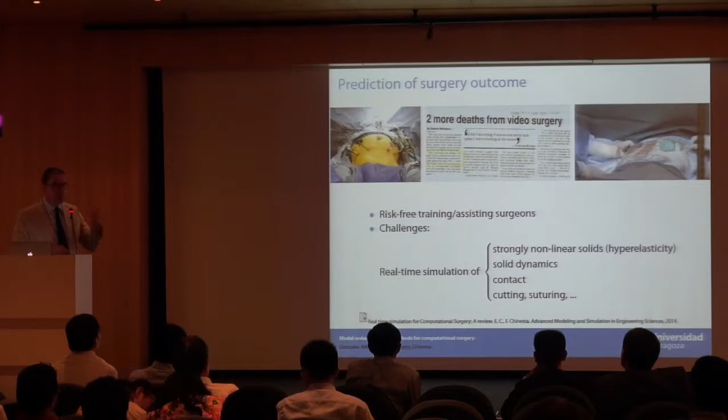Okay, so why not think of computational simulators as a way to train surgeons? But this faces important challenges. The most important challenge is the real-time simulation of the very complex coupled and nonlinear phenomena occurring during surgery. We will be dealing with strongly nonlinear solids. Soft living tissues are usually modeled as hyperelastic. We will need to take into account solid dynamics, contact, cutting, suturing, many challenging phenomena.

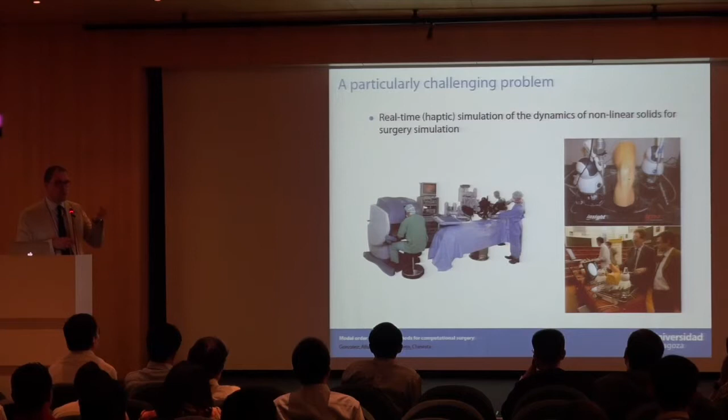Well, other training devices, you can find here two specific examples for knee and shoulder surgery, incorporate this type of apparatus. This is a haptic device, okay? An apparatus that provides you with the sensation of touch, the force response of the system.

But in order to provide a realistic sensation, very much like you need some 25 to 50 frames per second in cinemas to perceive a continuous motion, you need some 500 Hz to 1 kilohertz response in force feedback. Well, of course, you can imagine that this is a challenge. You need to simulate and to show your resulting images at 20 Hertz. Contact detection can be made in a parallel thread in the simulation at about 200 Hertz.

But more importantly, you need to simulate the deformation of strongly nonlinear soft tissues at 1 kilohertz, 1,000 times per second. Any of you that have played with Abaqus know how much time a hyperelastic simulation takes in an average computer. So the challenge of doing this 1,000 times per second is clear.

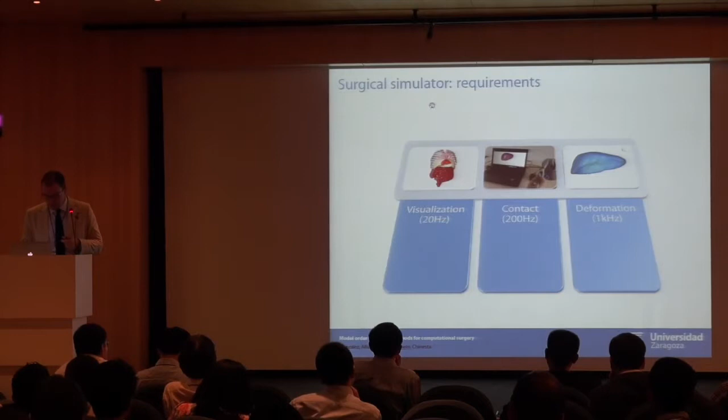And in the limit, if we consider haptic rendering, provided the 1 millisecond constraint on the result, we are able to accept an important loss in accuracy. The purpose of this research project is to improve the accuracy while maintaining the speed of the simulation.

Well, if we take a look at the state of the art in the discipline, Professor Satava made a taxonomy of the existing surgery simulators. He distinguished a first generation of simulators in which only the anatomy is represented accurately. Okay, the shape, morphology, essentially the surface of the organ is represented accurately.

We can consider a second generation of simulators in which the physics of the surgery is considered accurately. The deformation, forces, temperature, why not? And we could say that this second generation of surgical simulators has not been completely fulfilled at this time. There is a consensus among the surgeons that existing simulators do not provide a realistic sensation. And this is mainly because the deformation fields, the resulting stresses, etc., are not realistic, are not accurately simulated.

We can think of even a third generation in which cells, the activity of the brain, breathing, bleeding, etc., are considered, but to my knowledge, there is no such simulator today. Satava distinguished up to 5 generations, finally at a genetic level, but this is nowadays completely out of reach.

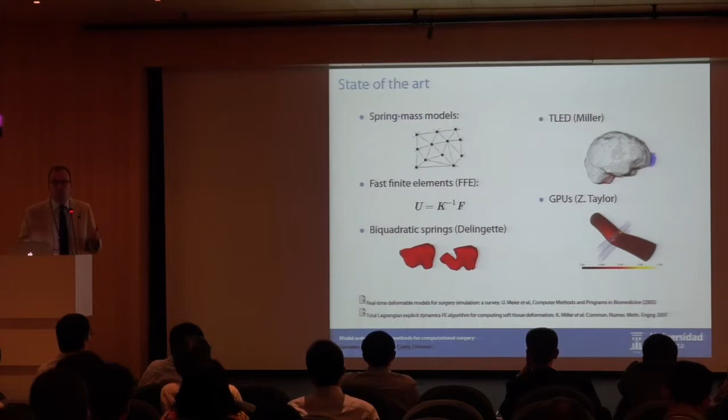Well, as I mentioned before, we consider this a key idea in the development of surgical simulators. Is it possible to store in memory as much information as you can? In other words, is it possible to pre-compute everything and just store it in memory and show the results, not simulating in real time, just post-processing in real time? Of course, if you are dealing with nonlinear tissues, dynamics, etc., your response maybe will be no.

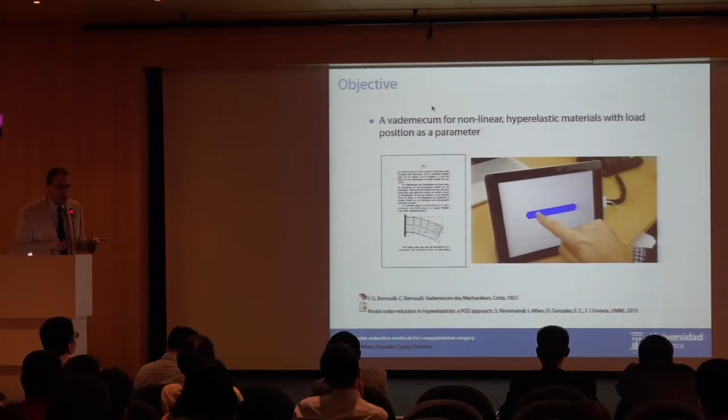The problem is that once you augment the number of parameters in your simulation, you consider problems in a parametric way. You consider, for instance, typically the displacement field in your organ, depending on the physical coordinates, time, the position of the loads, any other parameter you can imagine. The space where this solution lives is R to the power of the number of parameters, okay?

But the number of degrees of freedom of the finite element mesh of such a domain increases exponentially with the number of parameters. That's a challenge that has been coined the curse of dimensionality. In the words of Professor Laughlin, a Nobel Prize laureate, no computer existing or that will ever exist can break this barrier because it is a catastrophe of dimension. Okay? But it is clear that some kind of model reduction is mandatory if you are trying to solve this kind of parametric problem, or in other words, a vademecum.

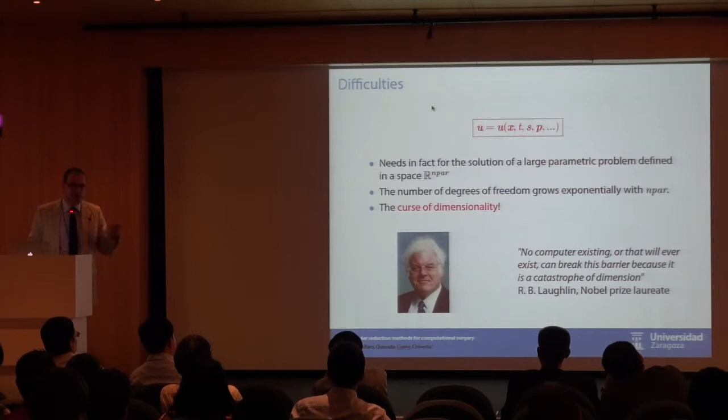If we think of classical model reduction, the so-called proper orthogonal decomposition, the idea is to decompose your solution U by an approximation, say up to m terms, in which the solution is composed of space and time functions.

The problem here is when you face nonlinear problems. In that case, you have the tangent stiffness matrix times your displacement vector equals the external applied force. You project these equations into the basis functions phi by pre and post multiplying the stiffness matrix. And the problem is that every time you need to update the tangent stiffness matrix, you need to reconstruct the full problem. And this is a loss of time.

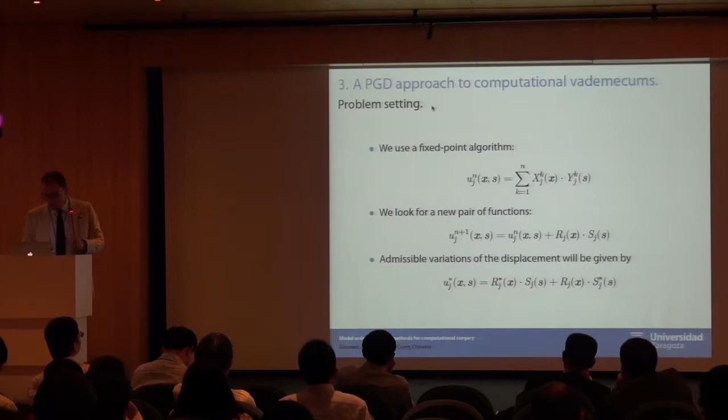Okay? If the problem is nonlinear, as is the case, you don't have time to update the tangent stiffness matrix. So that's why we have decided to employ a very elegant solution developed by Professor Michel Potier-Ferry, which is called the asymptotic numerical method. We expand the displacement, the second Piola-Kirchhoff stress tensor, and lambda, a load parameter, in terms of powers of A, which plays the role of an arc length parameter.

Okay, and we inject this expansion into the weak form of the problem, giving a very nice sequence of problems, one for each order of the expansion, from order 1 to order P. Once you discretize that by finite elements, you will readily notice that all the sequence of problems have the same tangent stiffness matrix, so no need to update. Okay, you solve sequentially the problem for all the different orders.

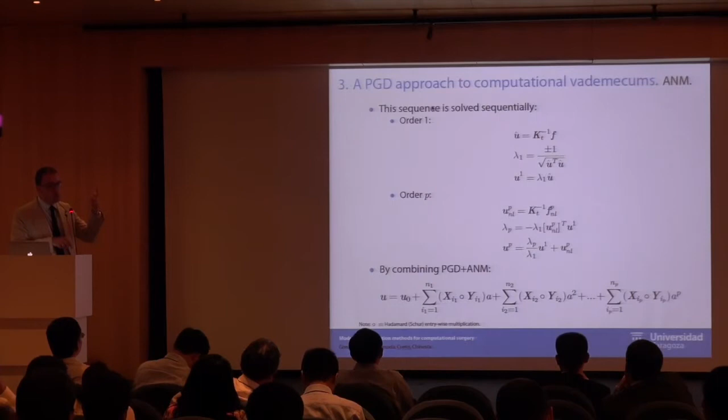If on top of this asymptotic expansion you introduce the PGD, you obtain an expression in which the displacement is a power series of A, the arc length parameter, and also a separated representation in terms of physical coordinates and load position S. Well, this works very well. Consider, for instance, the example I showed before, a cantilever beam, okay, nonlinear, neo-Hookean, hyperelastic, and you can see here the solutions for different orders of expansion.

Order 1, this is the traditional linear elastic solution, a big gain in volume, no physical visual realism. Order 2, still a bad solution. Order 3, things are progressing. Order 4, why not? This is more or less an accurate solution.

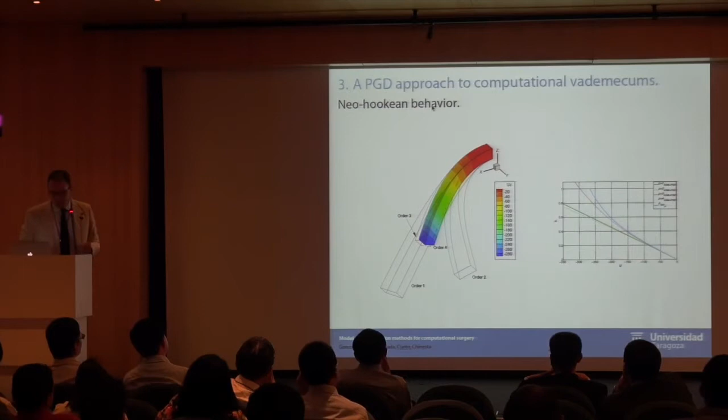We can compare the solution with, here in blue, a traditional finite element solution of the problem. You can see how from order 1, 2, 3, 4, you approach progressively the nonlinear behavior of the beam. You can do the same for the liver.

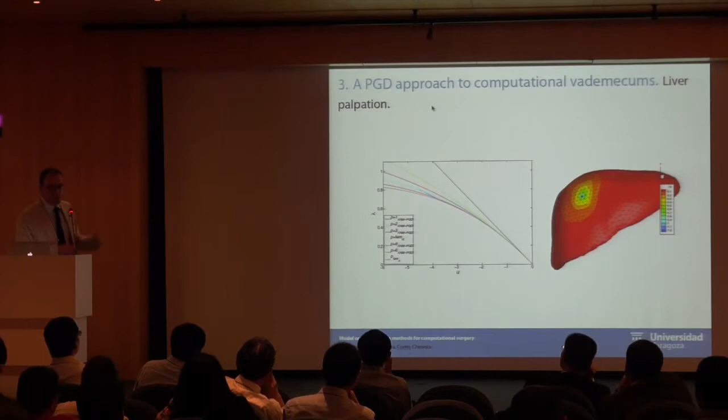We particularize, for instance, for any position S of the load, and for the nonlinear response of the liver, you can see that in this case, with an expansion of order P equal to 6, we obtain a very nice approximation to the solution, even far away where the finite element simulation broke by lacking convergence.

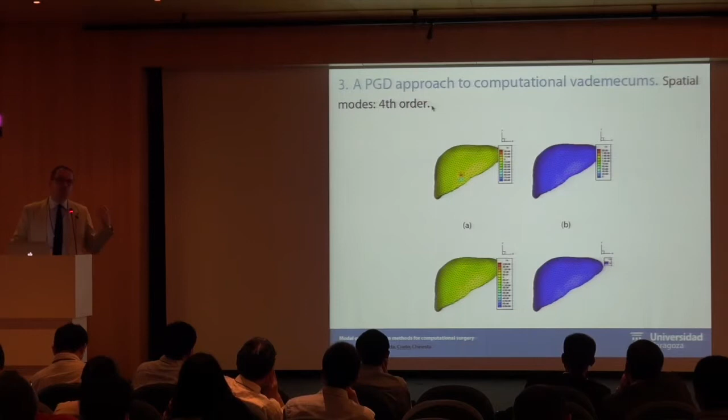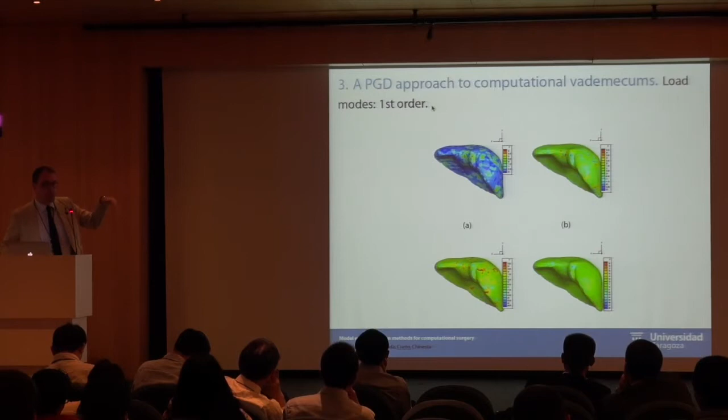Okay, just to show you how these functions X and Y, depending on the physical coordinates x and the position of the load S, look like. Okay, these are the spatial modes for the first order, the spatial modes for the fourth order term, and the terms for the load. These are 2D. These are defined on the manifold of the surface of the liver only, for the first and the fourth order of expansion.

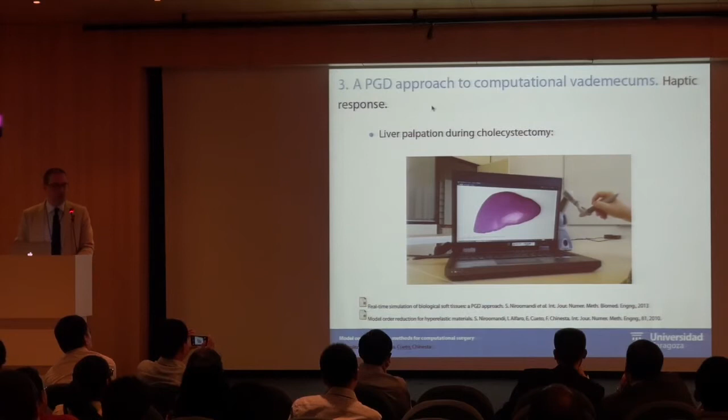Well, in practice, how does it work? You see here the haptic peripheral. You notice the force in your hand, and at the same time the liver is responding as expected in real time. No jumps are perceived, and the physical sensation is, believe me, very, very accurate. But so far, this is quasi-statics.

Okay, maybe your question is how to manage to store in memory everything when you deal with dynamics, with initial and boundary value problems. This is also a challenge. When history plays a role, how can you store everything in memory? Well, let us consider the standard formulation for solid dynamics, initial and boundary value problem, the initial conditions on displacement and velocity. In this case, we work with the weak form in a traditional way. This is just for the purpose of notation.

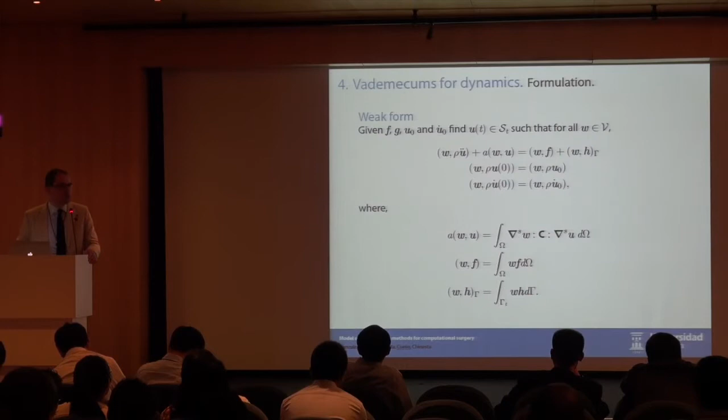The idea is to develop a vademecum, that is the solution of a parametric problem in which the parameters are precisely the initial values of the problem, the initial displacement and the initial velocity. So we obtain a vademecum defined in the geometry of the solid, say the liver, from the initial time of the time increment of your simulation to the final time of your time increment, and also the possible interval of variation of the initial displacement and velocities, but once discretized, the displacement at time n and the displacement at time n-1. You consider a possible range of variation wide enough, and we compute this kind of vademecum.

So we redefine the weak form of the problem so as to make it triply weak, in the sense that we integrate in omega and on the intervals of variation of initial conditions. So now the displacement field depends on the physical point, on time, and on the initial displacement and velocity. And the expression is the traditional separated form of the PGD method. V, as a function of t, plays the role of the typical finite element time coefficients. This is not a function. We are not computing a space-time solution. These are coefficients rather than functions.

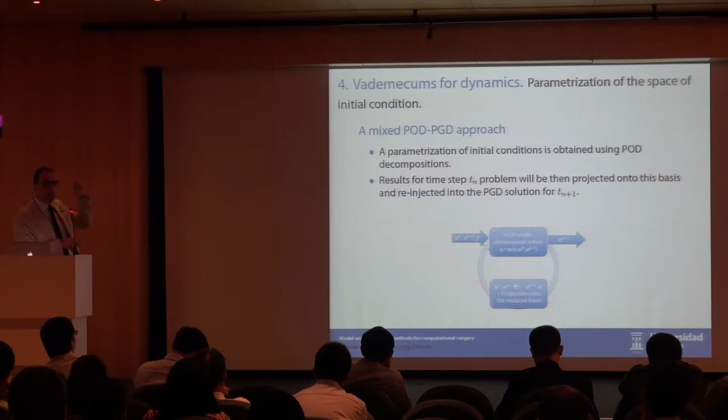The method works equally as in the previous case. You look for the new terms in the expansion, and what we finally obtain is a sort of black box. You feed the black box with the results of the previous time step, and this black box, taking these results as parameters, will give you the displacement field at the end of the time step.

The problem here is that the space of initial conditions has potentially many degrees of freedom. Consider, for instance, the mesh of the liver with some 35,000 nodes. Multiply them by 3 spatial degrees of freedom, and you obtain a lot of parameters, several hundred thousands of degrees of freedom. These are too many parameters even for PGD.

So what we do is to project these results in a better parameterization of the space of initial conditions. And this parameterization is obtained by means of POD. We solve a group of full problems. We obtain relevant information from them, and we construct a basis with very few degrees of freedom, and these results are projected onto this basis and re-injected again in the black box.

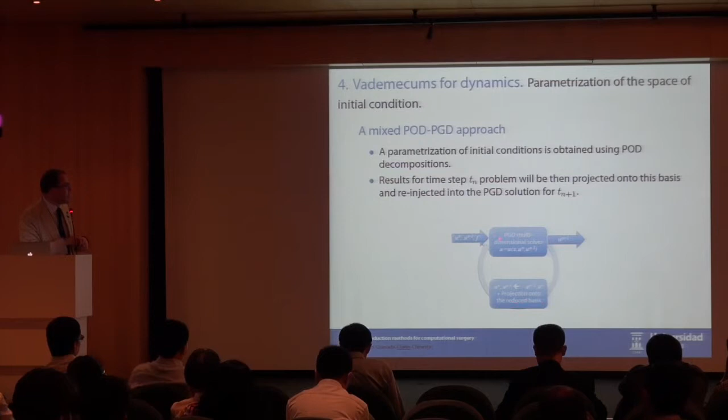Okay, that's the philosophy. To see how it works, an elastic block on top of which we apply a step load. You see here the waves traveling all along the block.

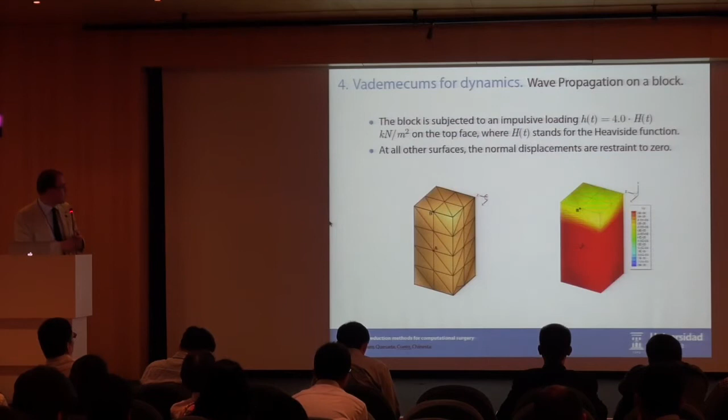Well, we compute the solution by employing standard finite elements and by employing our reduced order method. The time step in this example coincides with that required by the haptic device to provide an accurate sensation. Here, the continuous line is the reference solution, and the dotted red and blue lines are the solutions for points A and B, respectively. Here, the basis for the parameterization of the space of initial conditions contains only 3 degrees of freedom. And you see that the results look quite nice.

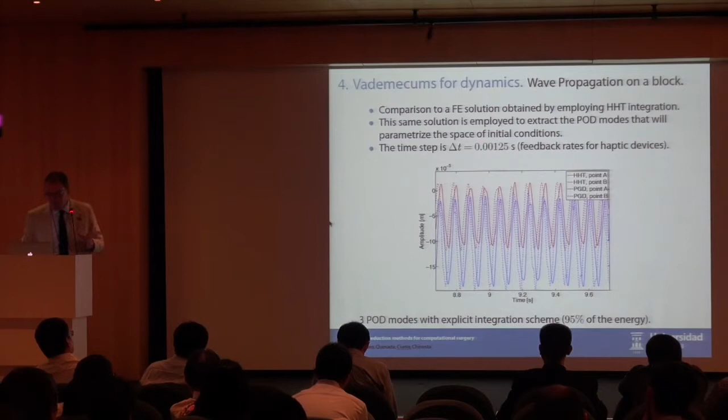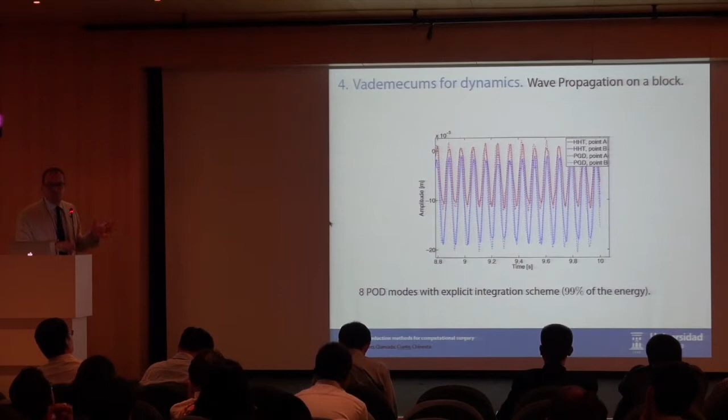If we increase a little bit the number of degrees of freedom of these bases, 8 bases for the space of initial conditions, you see that the results improve a lot. And you can employ here your favorite time integration. For instance, if we employ energy conserving algorithms, you will see in a moment that we obtain results for an integration time step of 0.001, between 0.0009 and 0.001. So very accurately in the real-time limit, and using a standard laptop with MATLAB. No special requirements are needed.

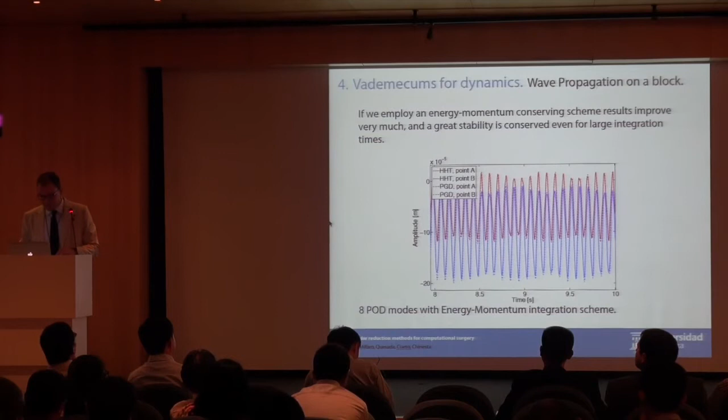Well, as I mentioned before, if we employ energy momentum conservative integration schemes, the results are almost exact even for long times of integration. These are 10 seconds. Well, let's take a look at the results. Consider the palpation of the liver. We apply a load and then release. No damping is considered for the moment in order to test for the artificial numerical damping in the method.

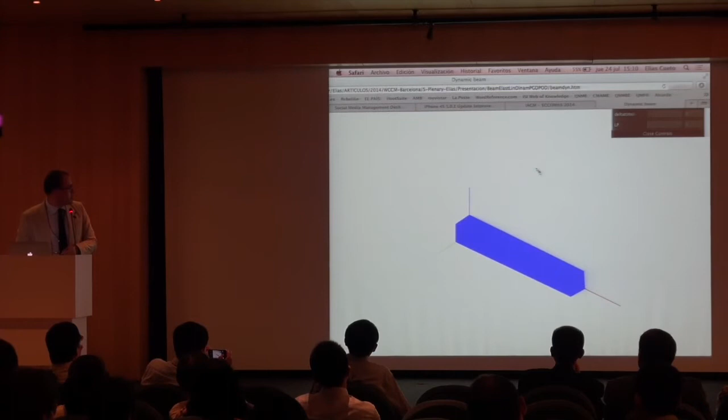Just to show you how this works in practice, if you implement these algorithms in a web page, this is running in Safari, you can play, you see the mouse, and you can play with the beam and see how it works. Every time I put the mouse on top of the beam, I apply a load, okay? And it works perfectly in real time. Even in this case, we are obtaining visual real time, but it is an implementation in a web page running JavaScript.

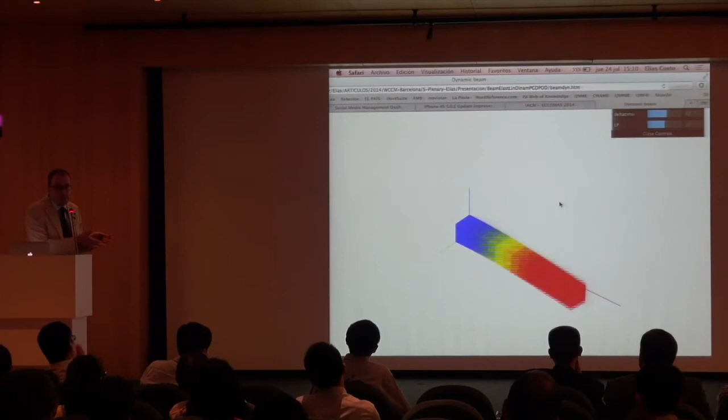Well, just to finish, some topics in which we are working at this moment. There are some remaining aspects of surgery that go beyond the kind of approaches that I mentioned before. One is that of contact. How can we simulate contact in this framework of storing in memory as much as possible? Well, the method that we have implemented is a very simple method in which we consider the contact between two different solids. One of the solids, say omega-1, is equipped with a level set function containing a distance function. The other, say omega-2, is a point shell. That is, we consider a shell of marker points on the boundary of the solid.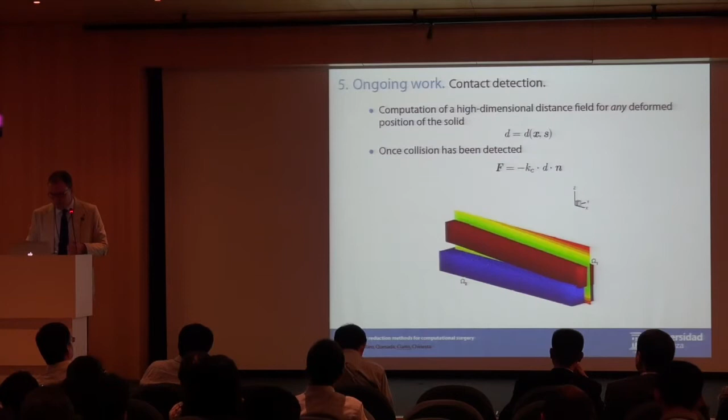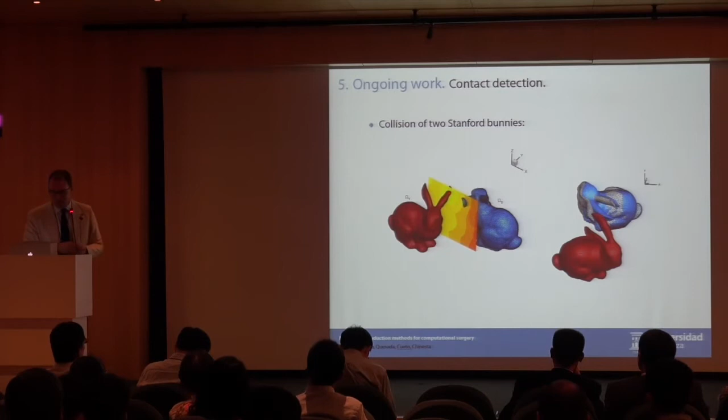This works very well even for very complex geometries. The classical benchmark of the Stanford Bunny. Here we consider two solids, one in red, one in blue, and they cross and they touch in the ears, provoking the displacement of the ears. You can see also the level set field accompanying those two solids.

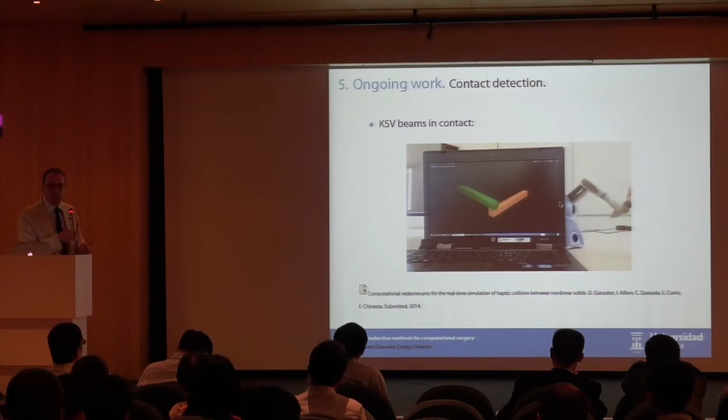Again, an implementation in a haptic environment. You can see that we use a standard laptop, and just by playing with a haptic device, you can manipulate the beams. And what is impressive is the sensation of the increase of the stiffness of the system once both beams get into contact.

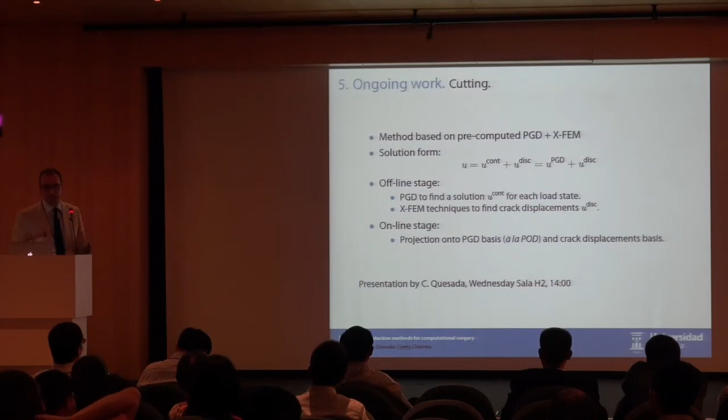The other important aspect in the simulation of surgery is, of course, cutting. How to store in memory every possible cut that a surgeon can make in an organ? You would say it's impossible. Well, I agree, it's almost impossible.

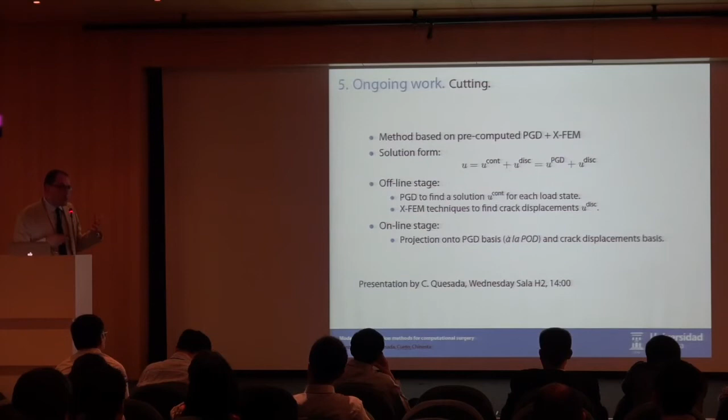But the approach that we follow is based on a combination of PGD and XFEM. We consider the displacement as a continuous part and a discontinuous one. The continuous one will be reproduced by PGD, and the discontinuous one will be reproduced by standard XFEM techniques. Once a cut has been produced, we project the results onto the PGD basis and the XFEM basis, say in a POD way.

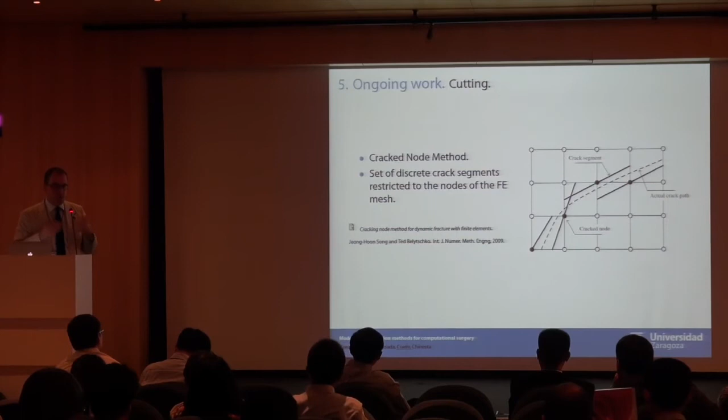The other ingredient is not a standard XFEM technique, but the so-called cracked node method developed by Ted Belytschko, in which we consider only cracks that cross the nodes. We consider a discrete description of the cracks that nevertheless, for a dense enough mesh, provides very convincing results.

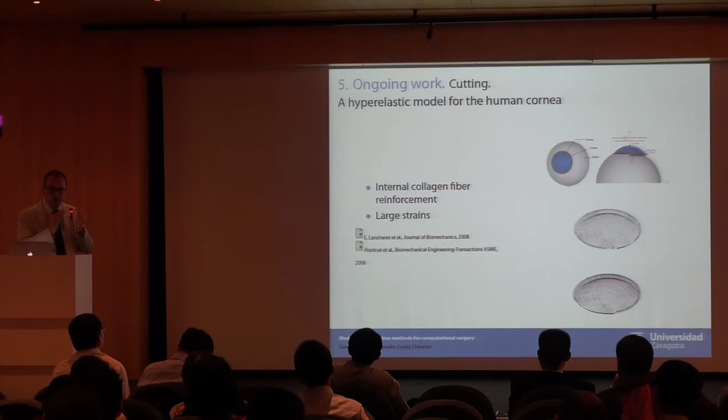An example: surgery for the correction of astigmatism. This type of surgery some years ago was made by acting on the cornea, by just cutting the cornea, by modifying the stiffness. The cornea is subject to internal pressure, so by cutting and changing the stiffness of the cornea, a modification of the shape of the cornea is achieved.

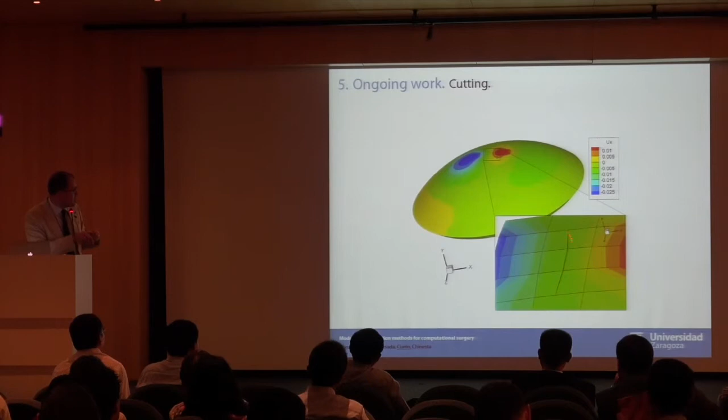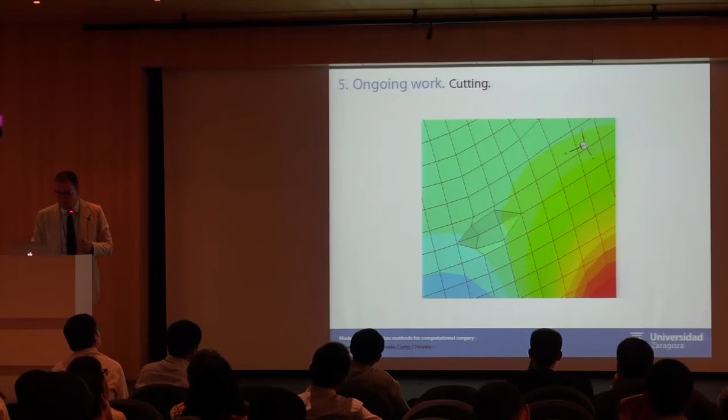So this is the cornea, a very detailed view of the cornea. The idea is to be able to practice cuts in the cornea. Consider for instance that we will pass a scalpel through points 1, 2, 3, 4, making a cut in this cornea. Well, this is, as I mentioned before, almost immediate. You can see how the cut progresses on top of the cornea.

Well, in conclusion, we strongly believe that the use of computational vademecums has a potential tremendous impact in the community, not only as a help for daily engineering practice, but also for many aspects related to real-time simulation. And computational surgery is just an example.

Imagine the potential of these techniques in the game industry, for games in which the results are not just presented on your screen, but simulated, with the possibility of having touch as a feedback response. Also in industry, for virtual prototyping. Why not in augmented learning? Why not include vademecums to help our students learn strength of materials, for instance?

What is important is that even for very complex, non-linear, state-of-the-art numerical simulations, we are able to achieve kilohertz feedback rates without any special hardware.

What control mechanism do you have to guarantee that your configurations in direction and magnitude are represented during the evolution of the solution, or do you just take them as a parameter? The most general formulation includes not only the position of the load S as a parameter, but also the value of the three components of the load. But they have to live in a space. You have a basis in a certain space that translates the reduced order model to the full order model.

Oh, you mean follower loads? Yes, everything has to live in the same space. Otherwise, if I translate it to the haptic device, such a configuration is not allowed. The case of follower loads is a little bit more involved. You're right. In this case, it's a standard formulation, where not only the position but the modulus and orientation of the load are parameters. The case of follower loads is still in progress.